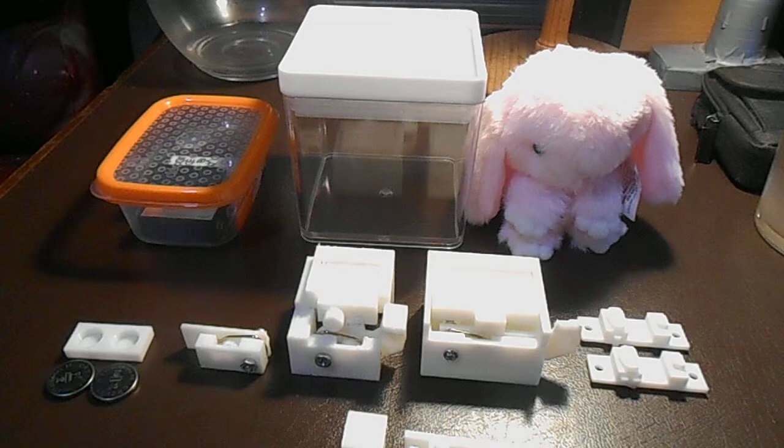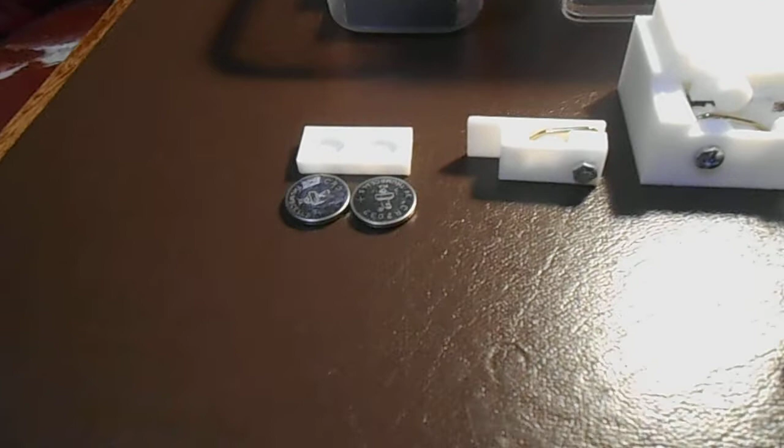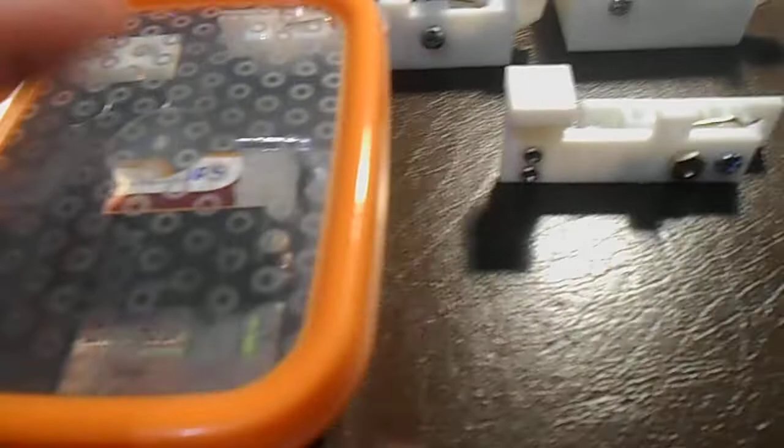This has been an interesting journey, this thing. It started a long time ago, making these clips up. These button batteries are a constant problem for me. This is for my guitar, and my guitar takes button batteries. My new electric acoustic ukulele takes button batteries. Scales take button batteries. And of course they're all different - this is 2 out of one of my calculators, and this is 2 out of something else. They're all different sizes.

So I wanted to make a clip to be able to lock the lid in place. I had somebody suggest doing it the easiest way, but that's not design. Design is about customising it to the way you want it.

I bought a nibbler, and the idea is I'm going to be reinforcing these things with metal plates, screwed or glued onto the PLA. It'll still have the PLA look, but it'll have the strength of metal - might be aluminium, might be steel. I'm going to try and find a way of laminating the steel and the PLA together to give it strength and reduce the size of these things.

But this process - what I'm finding with design is that every time you change one thing, you change half a dozen other things, and it's really, really difficult.

One of the problems I had is I had the function, then I had to try and build a box around it, and that was really, really hard. You could probably buy a book to show you how to design things, but they're going to be talking about stupid stuff that has nothing to do with anything.

I had to butcher that to make it work. I couldn't get the lid on because it had a hook on there, and I had to break that off to make it work. It did actually work.

I can actually get that to work, and that does slide out, but you've got to take a screwdriver to it. This one here worked, but again, all sorts of problems.

It's got a recess in that box section there. That kind of worked, but as you can see, look at the contraption you've got in there. It's quite complicated - a lot of stuff going on, a lot of dimensions. You've got to get everything exactly right.

Then I found out I needed to actually pivot that whole assembly around. This one at the back has got the screws on it. In actual fact this was an extremely good design - that there is absolutely excellent, but see how it falls down there? These ones are in different positions, where that one's 5 points up and this one's 10 points up. That's why I numbered them.

And of course, when I did all that, it fixed it in place. Then I realised you could put it on one way, and put it on in reverse the other way - so you can either have it mounted like that, or put that plate on the other side. So this is constantly one step forward, two steps backwards all the time.

So what I've done now is I've designed this, and as you can see, it's got a pivoting base.

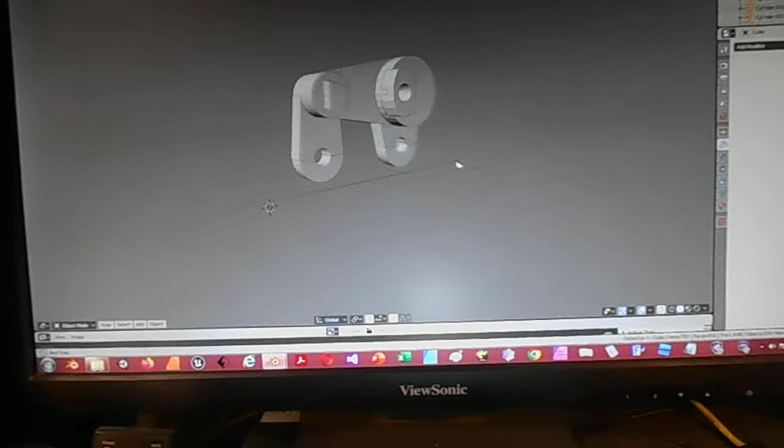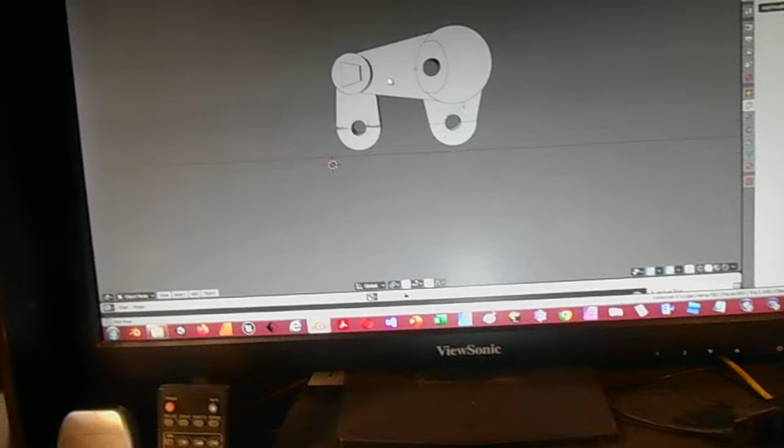Now that I've thickened the base, I'm going to check how far down the bolt holes are, because that's a lever and it's going to have a lot of pressure on it, putting pressure on these things at the bottom. So that's actually not a very good design, and I really want a hole up around here somewhere, a tiny little screw, just to keep it strong. But it may have to be recessed, and luckily that's thick enough to do that. The accuracy you've got to get with this is just insane.

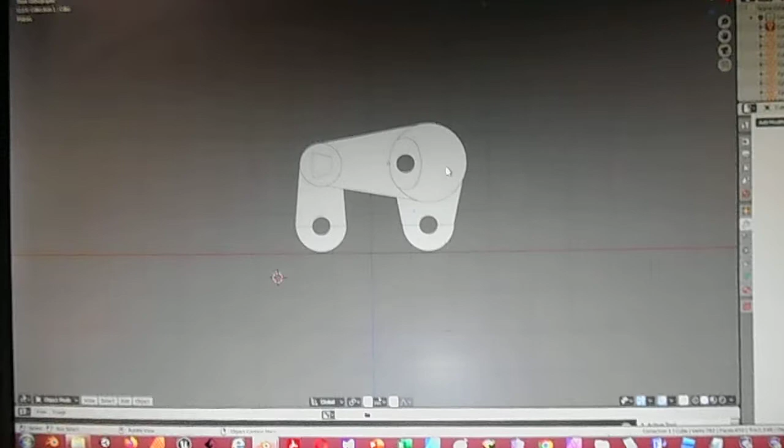Navigating in Blender is something you really have to learn. The very first thing is you've got to learn how to do this: you've got top, left, front, and I can't hit shift and control, but you've also got halfway controls, and when you're in different modes it tends to do different things. But the bottom line is you've got to keep developing this.

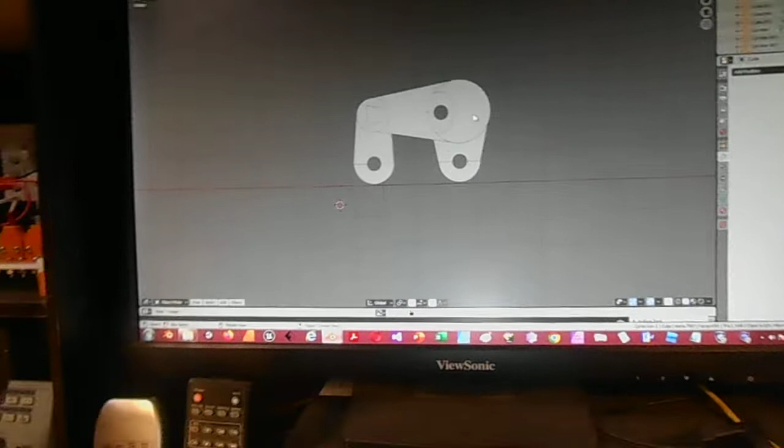This is so simple, but this is my design, and I like that. I've impressed myself with that. That's my design.

At a later date I can make that out of metal and laminate it and make it very, very thin. What I also did was use PLA for the thing pushing on the spring, that centre piece. What I did now, I actually did it by accident, is I made this one out of metal, where it's actually a screw head. So that makes it a lot stronger - it's not pushing on PLA, it's pushing on the coil spring.

These are the pegs, and of course now the local Coles have found out I'm using Coles pegs in my designs, they'll discontinue them. They do that with the batteries too - they don't sell the rechargeable batteries at Coles here anymore, as soon as they find out I'm using it for my designs, they discontinue it. But all I'll do is find the supplier over in China. I'll find out who actually makes them - somebody will tell me, they'll probably have it written on the back.

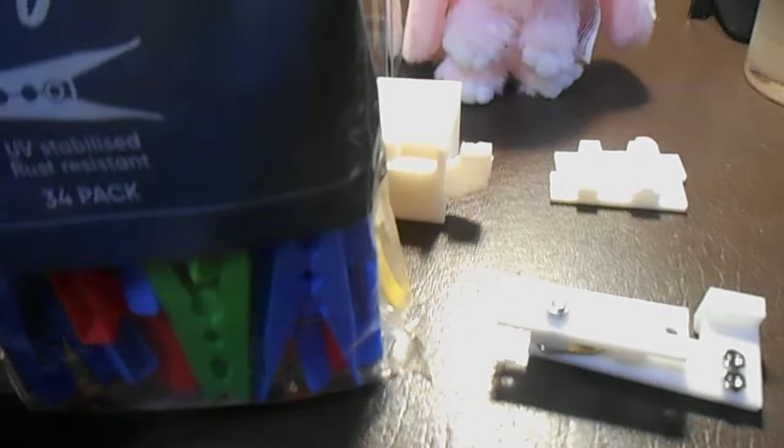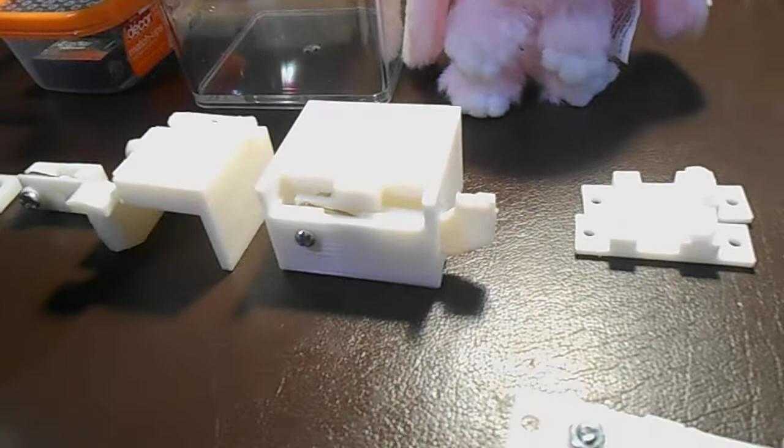Here we go, what have we got? They'll have it written on the back who the manufacturer is, and you get in contact with them. The only thing is if I want more of these, I'll probably have to buy 50,000 of them. But oh well, I might be able to work something out - I might have some rejects I can get. I only need the bloody springs out of them, and they might even sell me some springs.

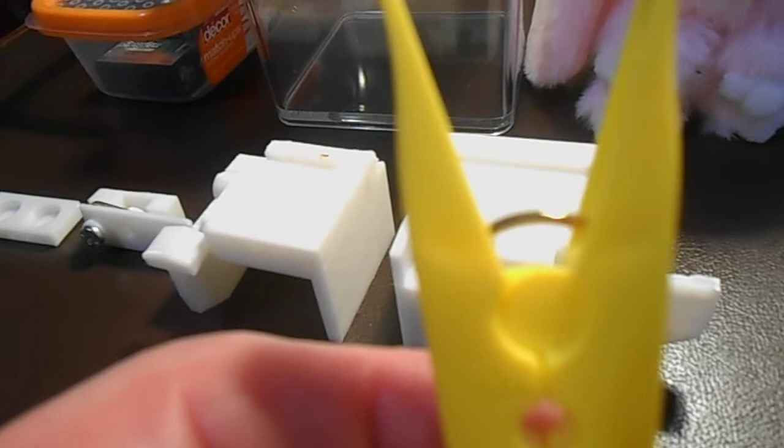If you get in contact with the wholesaler, they might have 10,000 and I might be able to buy them cheap, but it's only actually the springs I use. If you want to pull the springs out, you just get a screwdriver around that loop there and pull up - it's actually just clipped in. So they're very handy little springs, and they're gold coloured and really cool looking.

That's the design of the base, what it looks like, and that's now got a round base on it, which makes it really cool. This is getting quite advanced, but every time I change one thing, I change up a dozen other things. Still struggling with this, but it's coming along nicely.